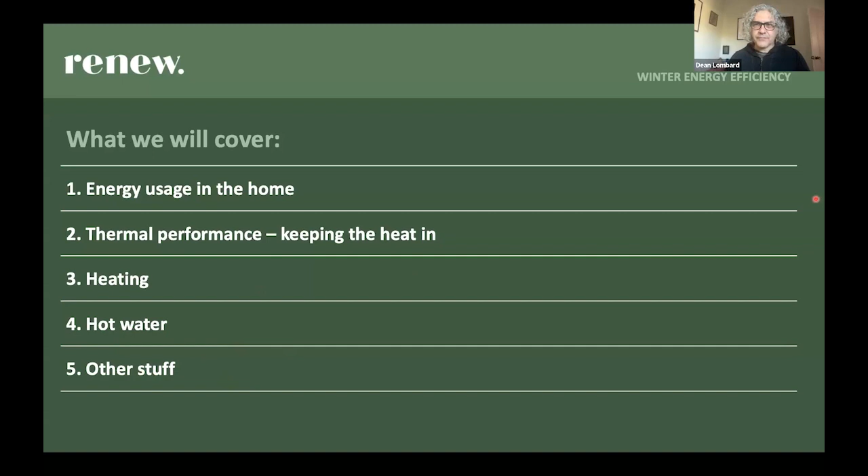Then we'll talk specifically about heating, keeping warm, because that's always our biggest concern in winter. We'll talk a bit about hot water too, because that's also a big form of energy use, and more important in winter than in summer, because we really like to warm up in a shower or a bath. Then I'll go into a whole lot of other stuff, talking about the smaller but still effective types of energy usage that we have in the home.

It's also the average for Australia, so things vary a bit in different climates and areas where different types of appliances are used. It also varies according to the size of your household and lifestyle, so it's really just a rough average, but I think it's very indicative because it shows that nearly half of our energy usage in the home is for either heating or cooling or both. In colder climates like Melbourne and Southern Victoria, that's more heating and not as much cooling. In warmer climates, it's a lot more cooling and hardly any heating, but the proportion remains remarkably similar around Australia. It's just the most important thing we use energy for in the home.

The next one is water heating, and this can vary a lot depending on the technology you use to heat your water, but this is sort of an average.

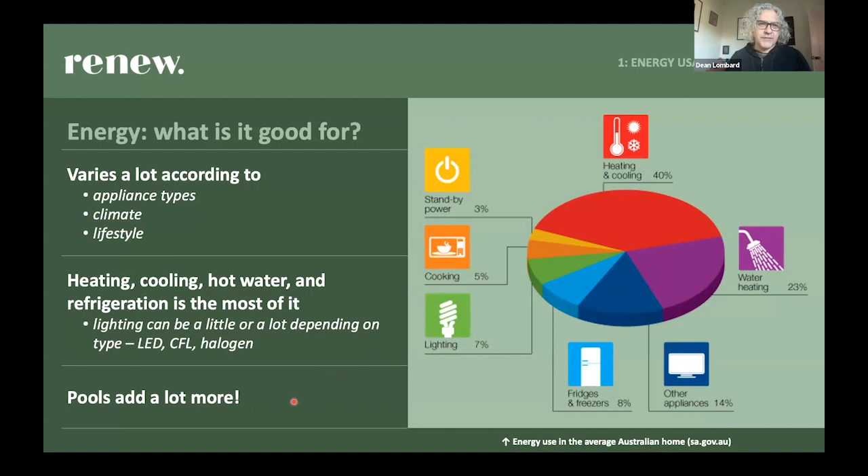If you've got a pool, that changes the whole thing, because pool pumps and filtration use a lot of energy. And if you've got any particular stuff you use that's less common, like kilns or welding equipment, that can make a difference too, depending on how much you use it. But this is sort of the average.

When we're thinking about how we can save money and energy in our home, it's always good to think about what am I using now? Am I using a lot or a little for the value I get from it? Because you might already be using energy efficiently, and then you'd have less you can do to make a difference. Alternatively, you might be using energy quite inefficiently without even realizing it, and then you've got a lot you can do.

That's a good indicator of what times of year you use more, and that's usually dependent on your heating and cooling. The other useful thing in the bill is it looks at your daily usage, and your daily usage is always written somewhere. That's a really good benchmark figure for you to make rough calculations about how much it's going to cost me.

It actually looks at your daily usage and compares it with typical households of different sizes in your area. This is from this big project that the Australian Energy Regulator has done, where they've looked at typical households in all different areas of Australia and worked out what's the usual energy usage for those households. Again, we're all different - we all use energy differently, our houses are different, our appliances are different. It's a rough guide, but it's a good indication.

Basically, you put heat into your house with your heaters, heating system, whatever, and the heat tries to get out of your house whichever way it can. That's why we have ceiling insulation and curtains on windows and all that, to try to stop that.

Some houses let heat out really easily. You'll know if you're in one of those because you'll run the heater, you'll be warm, and as soon as you turn the heater off, you get cold. If your house is well insulated and prevents a lot of this heat from escaping, the house will stay warmer for a lot longer.

Ceiling insulation is absolutely the most bang for buck in terms of how much you spend to get the most benefit from keeping heat in, because heat goes off in all directions but likes to rise most of all. So if you've insulated your ceiling, you will keep a lot of the heat in.

The other ways heat gets out: through the windows, through the walls, through gaps in the building material of your home, and down through the floor. So there's all sorts of ways.

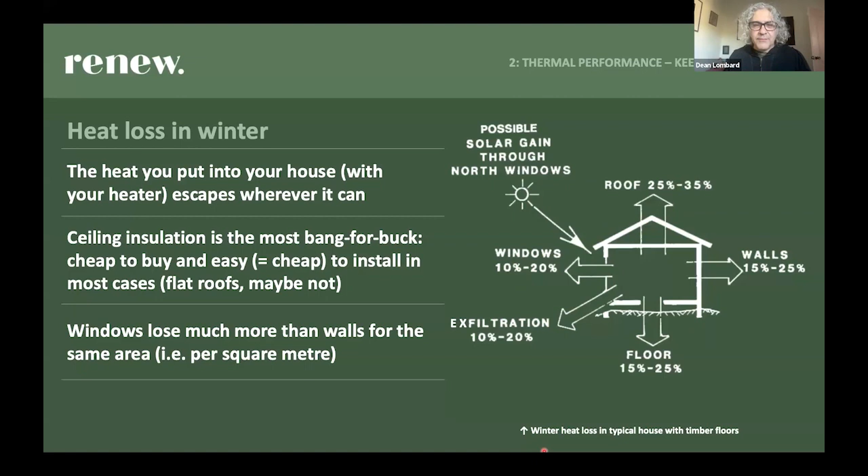Insulation is usually pretty cheap and easy to install, but it's more difficult in some types of roofs, especially flat roofs. So if you don't have a traditional peaked roof with a ceiling space, you might need to do a bit more work to find an installer who can give you good info about how best to insulate it.

Little deviation into star ratings. If you're doing a major renovation or buying a new home, it will have to have a NatHERS star rating.

This is a national system for rating the energy performance of houses based on the design specifications. The current standard for the last 10 years has been 6 stars, and recent changes to the building code are introducing a 7-star standard. A typical existing home is maybe about 3 stars.

A home built in the last 20 years will usually be at least 5 stars, though there is a bit of an issue where some houses actually perform lower than they're supposed to.

The star rating just reflects the ability of the house to keep the heat in. This really shows that if you do some work to make your house keep more heat in, you can save a lot of energy and money and still feel as warm, or probably warmer often, because more thermally performing houses keep the heat more stable inside.

If you've got an old house, it's pretty hard to get it up to the 6 or 7-star standard, but it's not so difficult to get a lot of them a couple of star numbers ahead of where they are. That makes a big difference - every star increase makes a big difference with energy usage and cost of energy.

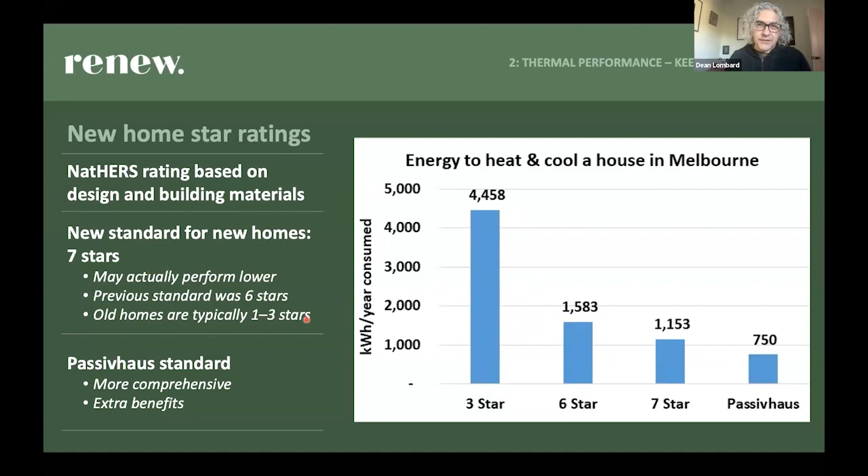There's also another type of star rating called the Residential Efficiency Scorecard that's specifically designed for assessing existing houses, rather than the NatHERS system, which is based on plans and new houses. This was developed by the Victorian government, and if you go to homescorecard.gov.au, you can find an accredited residential efficiency scorecard auditor.

They'll come to your house, talk to you about how you use your energy, and assess the home - looking in the ceiling, at your walls and your appliances. They put together a detailed report and give you advice as to what you can do to most effectively increase your comfort and reduce your energy costs.

As part of this program, they're also building a bit of an information bank about the variation in performance of houses across the state, which is useful for looking at policy issues. I really do recommend it - it costs a few hundred dollars usually to get one of these audits, but it's pretty worth it. You can save a lot of money, especially if you own a house and can make substantial changes, like changing appliances or insulation.

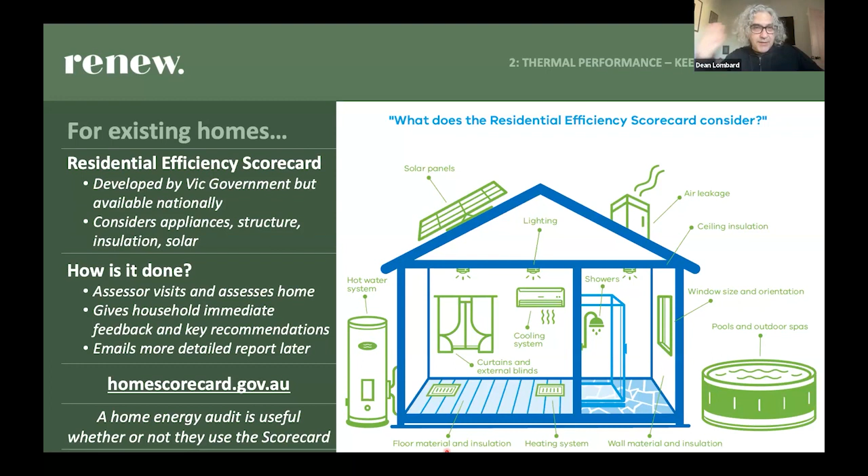I had one done in my house several years ago. I was renting, but they had a scheme where they did it for renters. And even though as a renter I couldn't do that much to change my house, the audit still was really useful and helped me make some big changes just in how I use my appliances.

The residential efficiency scorecard is literally a scorecard where they rank your house on these different areas and tell you how good it is. Then they tell you what you can do to make it better. So that's a good one to understand more about how your home performs.

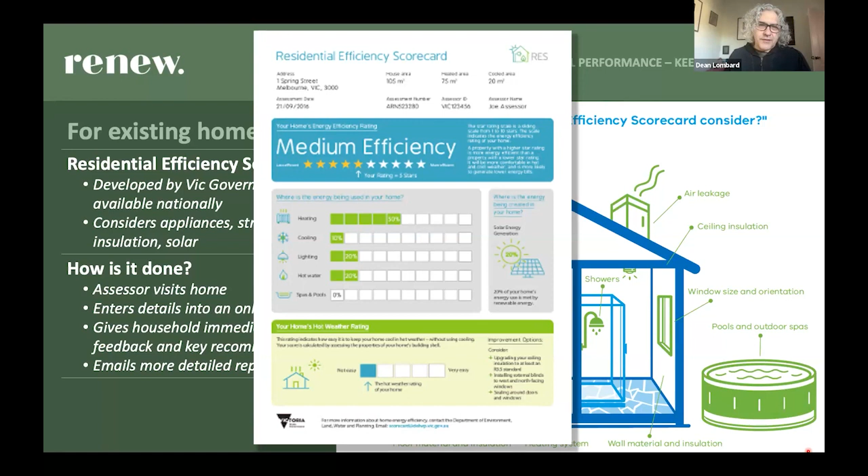That information can often help you figure out, okay, if I've got a limited budget to upgrade my home to make it more efficient, what should I focus on most? What gives me the most value? If you don't have good insulation already, ceiling insulation is usually the biggest bang for buck, because you lose so much heat out of the ceiling.

There's a bit of information about insulation - the R rating is just a system for measuring how thick the insulation is. R5 is pretty typical recommendation for ceilings, and walls are about half that.

A lot of houses have partial insulation in the ceiling, sometimes just because of bad installation, sometimes because of things like downlights that can't be covered by insulation, so they have gaps around them. You've got to really be careful of gaps in your insulation, because even small gaps actually reduce the performance by quite a lot. By the time you've got about 10% of your ceiling uninsulated, the insulation is only doing half the work it could be doing.

So that's good to know. One thing I did with that rental house where I got that inspection was I discovered there was a bit of insulation missing, and I got a bit more put in and made a heap of difference, even though it was just a bit. So that's good to keep in mind.

Wall insulation is much more difficult and expensive to retrofit in an existing house. If you're building a house, it's a no-brainer, and that's pretty much required by regulations now. But it's not always cost effective in existing homes - which doesn't mean it has to be cost effective, because it will make you more comfortable as well as save money, and that's worth something. It's much easier in some houses than others, depending on the construction of your walls. If you want to retrofit wall insulation, you really need to talk to an insulation specialist to find out what options are for your house.

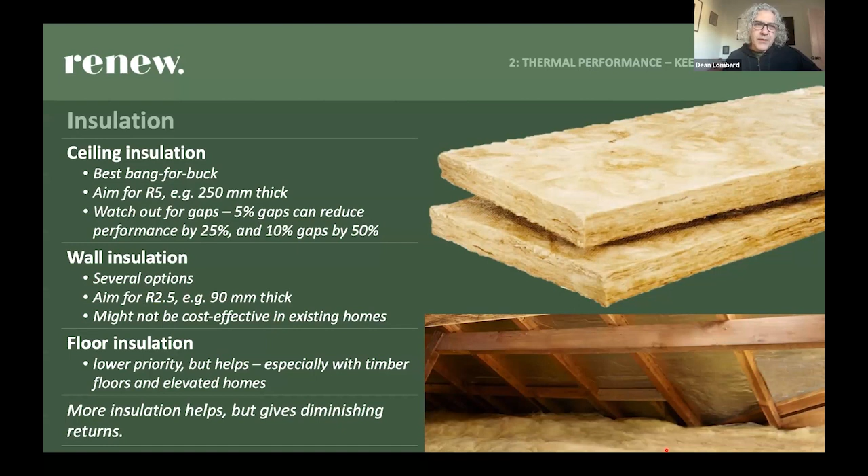One important thing about insulation is, as some of you might remember from the insulation scheme 10 or so years ago, there are a few safety issues with insulation if it's not installed properly. A lot of people do insulation themselves. It's completely legal to do it yourself, it's not like electrical work where you have to be licensed.

But there are some serious safety issues. So we strongly recommend, if you want to DIY ceiling insulation, it's not really advised unless you've got experience working in roof spaces, or some training. The risks include dehydration, injury, electrocution, and actually house fires. This photo is from a house that had insulation covering halogen downlights, which caught fire. Yes, all of those things have happened.

If you remember the free insulation scheme, it was these incidents that led to the end of the scheme, even though the rate of incidents was actually lower during the scheme than before it. But the increase in insulation was so big that it was very noticeable. So just be really careful if you're doing that, and really recommend you've got experience or training before you do it. Sustainability Victoria's website has good information about safety tips for installing insulation, you can just Google it and find it.

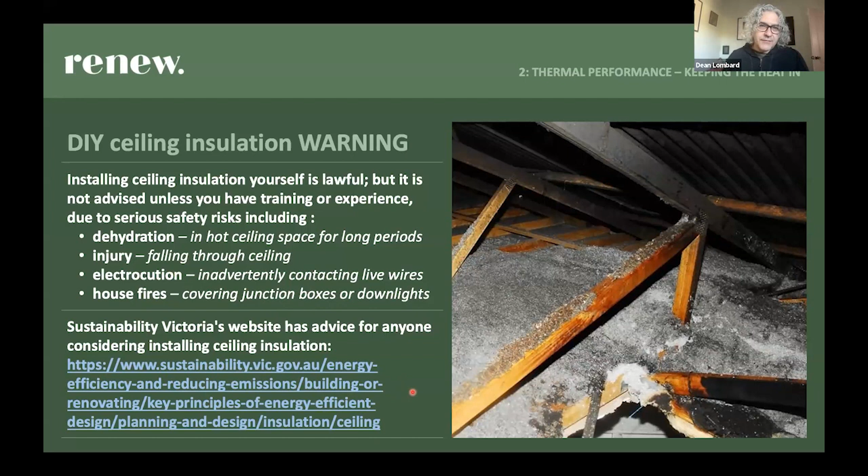Like I said, the other thing is windows. This picture is from a thermal camera, and as a quick aside, some libraries around the Western Suburbs councils have energy efficiency kits you can borrow. I think Hobsons Bay might be one, and I know Maribyrnong has them too. These kits have thermal cameras and other equipment that helps you find efficiency issues in your home. Thermal cameras are great because you point it at the house from inside or outside, and it shows where the heat or cold is getting in or out.

This house has good insulation in the ceiling and walls, and the red bit is warmth coming out, while green and blue is coldness. You can see all this heat is coming out the windows, some around the eaves, and out the garage door. These are the weak spots in the house where heat gets out more easily. This is a good example of why window coverings are so important for keeping the heat in.

People might use double glazed windows as well. They're also very effective, but window coverings, like good thick curtains, are almost as effective as double glazing, but far, far cheaper in an existing home. If you're building a new house or a major extension or renovation, double glazed windows are really worth it. They cost a bit more, but they perform so much better. But replacing existing windows with double glazing is very expensive, and it takes about 60 years to pay back, so not so worth it financially.

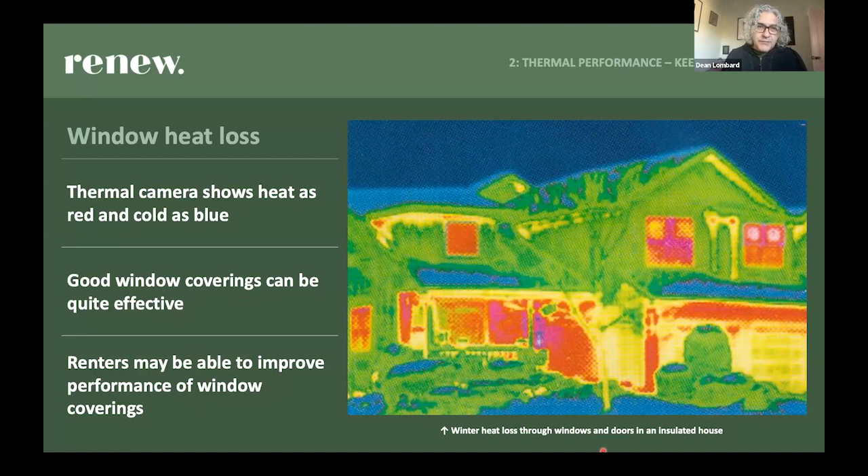But good curtains or special blinds are pretty good for windows. Here's a little thing on windows: a window with thick curtains loses nearly half as much heat as a window without curtains, and pelmets make it even better. You can also get honeycomb or cellular blinds that fit into the window frame and make a good seal, with an air gap that insulates pretty well.

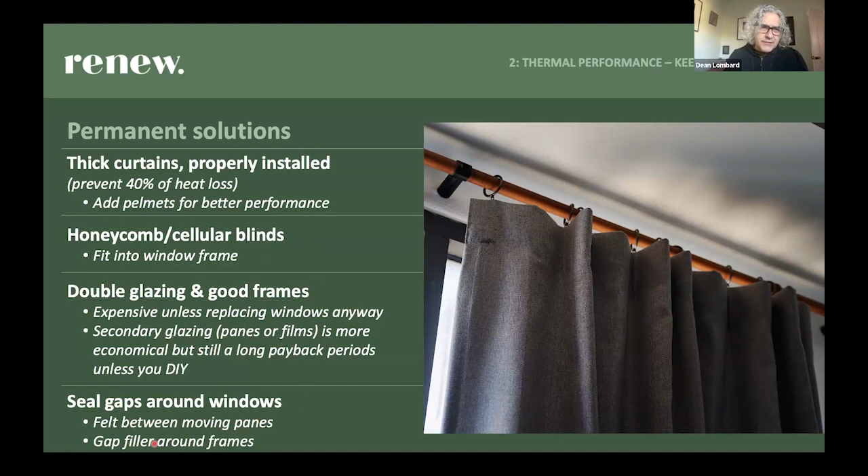I mentioned double glazing, not so cost effective as a retrofit, but certainly good if you're building or extending. Also look for gaps around the windows, around the window frames, anywhere where a thing goes into the wall there's going to be gaps, and filling gaps between panes of glass and between the window frames can really make a big difference.

I just want to explain the importance of pelmets. Even when you've got good warm curtains, like here's a good warm curtain and there's your window.

When the air is heated in the room, the warm air, which rises, actually travels along the ceiling and goes down in the gap between the curtain and the window, races past the cold glass, which sucks all the heat out of it. Then the air does a full loop and comes back in under the curtains as a cold draft, making you colder, making your feet cold. The heat's leaving the room. So this is the one issue with curtains, this circular air current happens.

And that's why pelmets are a thing. Some of you will have pelmets, you would have seen them. They're just like a little half box sort of thing that goes over the top of the curtain, down the side, across the top, across the front. The pelmet stops that movement of air, so the air can't go down because it's covered. So a good pelmet that covers the whole top of the curtain basically stops that air movement and really improves performance by about another 25%.

It makes such a big difference. Some people also put pelmets down the side. It helps a bit more, but the top is most important.

Pelmets come in all shapes and sizes. Some of them look a bit naff and some of them look quite nice. It depends how you do them.

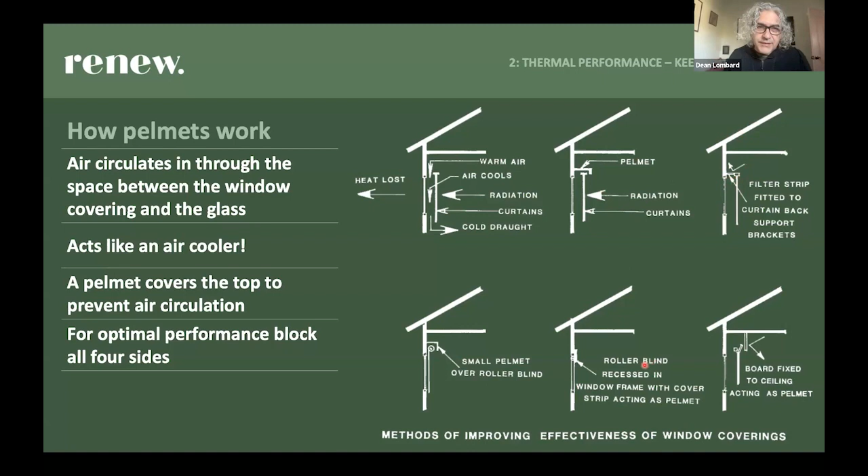But even if you don't get proper pelmets installed, or can't afford to do it yet, improvised pelmets like a bit of cardboard or corflute across the top of the curtains that stretches from the window frame reaching across to the top of the curtain, just anything to block that gap works very effectively. A lot of renters do this, putting a little makeshift pelmet across to the curtain rod to stop that movement of air.

The other thing you can do that's a bit DIY is what often gets called renter's double glazing, which is literally sticking bubble wrap on your windows. It works the same way as double glazing by creating an air gap between the glass and the room. That's how all insulation works, by putting that air gap to stop the transfer of heat.

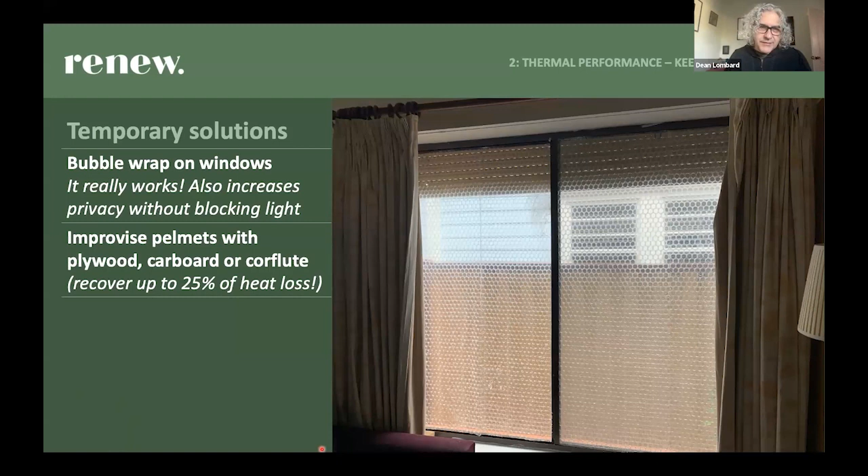You can get these more expensive window films designed as a more permanent-ish double glazing type thing, like a plastic film that you adhere to the window frames and then shrink with a hairdryer. So there's a few options out there for what they call secondary glazing or double glazing. It's always worth looking into, it does make a difference.

Houses need a bit of ventilation, so you don't want to completely remove all gaps, but most existing houses have way more gaps than are actually needed for proper ventilation. So dealing with these little drafts stops you feeling cold, because a cold draft blowing across the room also takes the heat out of the air.

So there's all sorts of things like door snakes for under doors, or you can attach draft stoppers to the bottom of doors. There's different types for different types of doors.

If you're not using a chimney, there are covers you can put out there, or things called chimney balloons that you inflate in the chimney to stop the air going out. For exhaust fans, you can get covers that have little flaps, and when the exhaust fan's running, the flaps open, but when it's not running, it closes again to stop it being a source of draft into the ceiling space.

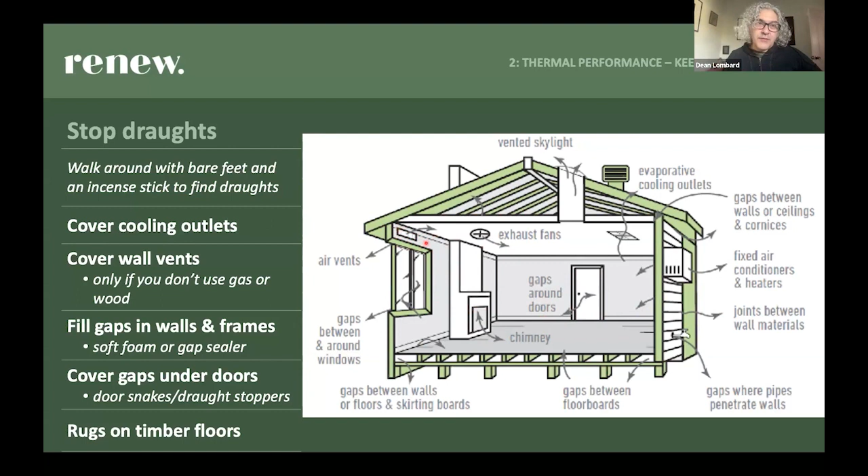If your house doesn't have any gas appliances - no gas cooking, no gas heating, and no wood burning appliances - then it's okay to cover up those vents to prevent heat loss, but very seriously only if you don't have any gas appliances or wood burning in the house, because they're very important for safety. You would have heard of news stories of people dying in houses due to a buildup of carbon monoxide, and that's what these vents are designed to prevent.

People sometimes ask, if I try to do my draft proofing, can I do too much? Can I make my house too tight? Yes, it's possible technically - there's actually a sweet spot. Like I said, you need ventilation. If your house is really leaky, it's drafty, the heat escapes, heat gets in during summer, and insects get in. If the house is too tight, it can cause mold and condensation and a buildup of carbon dioxide. It's actually pretty difficult to make a typical home so tight that you get these effects.

Most homes are pretty leaky, and a lot of attention to blocking up drafts gets you to this sweet spot where you're still well ventilated, but you're stopping the drafts that are taking the heat away. So it's usually good to try and do what you can to block up drafts. But just be careful if you are burning gas or wood to make sure that you leave the right amount of ventilation - usually those high ceiling vents are a good way to do that.

And draft stopping is significant - good draft stopping in a house can reduce heat loss by about 20%.

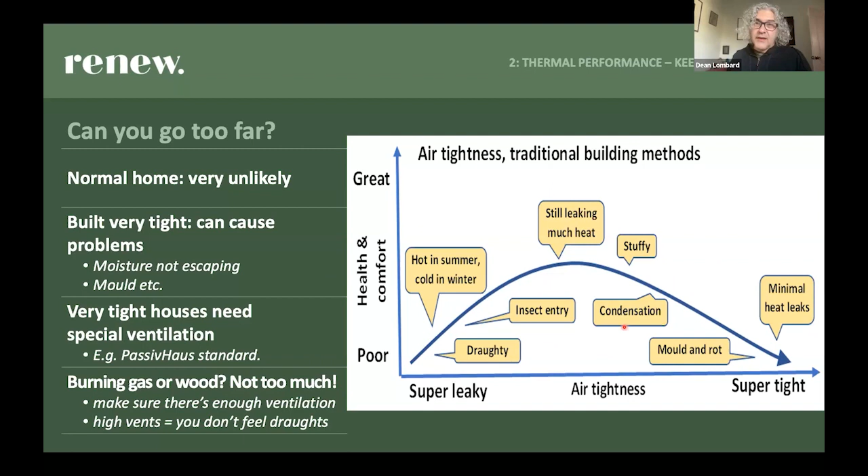The other thing that's interesting with the thermal performance of the house is what we call thermal mass, which is solid surfaces or materials that absorb heat. The classic thermal mass is like concrete slabs, if your house is built on a concrete slab, and solid brick walls. We've all experienced a garden with a brick wall that the sun shines on, which radiates heat and is good for the plants.

Some of you might experience a big window where the winter sun shines through and heats up the concrete floor and helps keep the house warm. This is really great for winter warmth, because it even works if you're heating the house and it's got, say, brick walls - the heat will soak into the bricks and hang around and keep you warm. There used to be heaters called heat banks that were literally a bunch of bricks that got heated and slowly released the heat.

The thing you've got to be careful with thermal mass is that in summer it can be a problem if you're taking too much heat from the sun when you're trying to keep the house cool. So if you're designing or changing your house, a good approach is to ask: how can I get sun in the house during winter onto my thermal mass? And then in summer, how can I shade that same place so the sun doesn't come into my thermal mass? So-called passive solar houses are designed like that, often using deciduous vines to give shade during summer and allow sun in during winter. The right size eaves can work for that too, because they let the winter sun in but shade the summer sun, since the summer sun is higher.

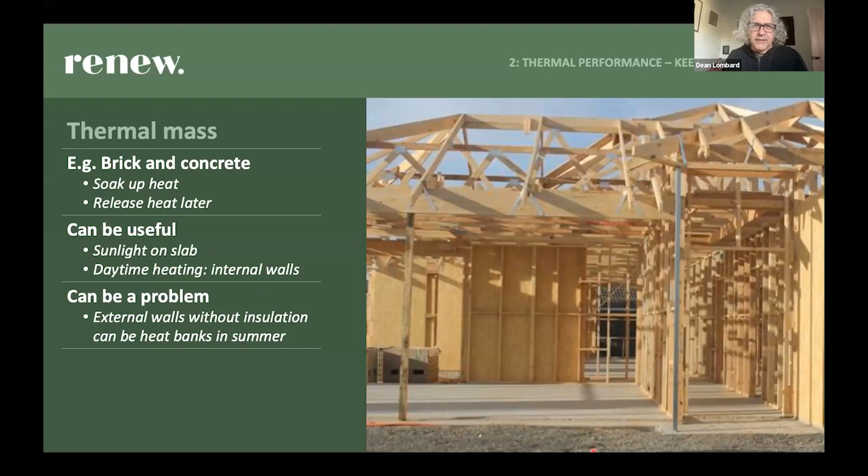But basically, they're very efficient. They're the lowest cost to heat an area. They're also low emissions because they use so little electricity that the emissions from that electricity are less than the equivalent emissions from running a gas heater to the same level. So the modern all-electric homes are all about having reverse cycle air conditioners - they cool and they heat.

In a house designed to have reverse cycle air conditioner heating, you'll have a few throughout the house, like a big one in the living room, and smaller ones strategically placed so you can heat the whole house. A lot of existing places might just have one that you've used as an air conditioner - that can still work pretty well for heating. And if you've got some money to invest in upgrading your heating, adding one or two more reverse cycle air cons is really the most effective way of doing that.

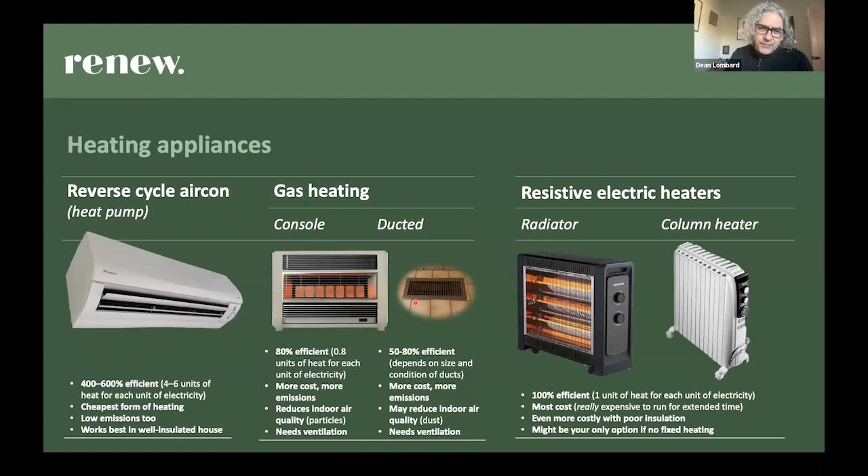So if you're stuck with portable heaters, they do the job. Focus on heating yourself or a small room more than the whole house. You really need fixed heating to heat the rooms well. The gold standard is really the reverse cycle air conditioner. Gas heating does well enough, but it costs more to run and causes more emissions.

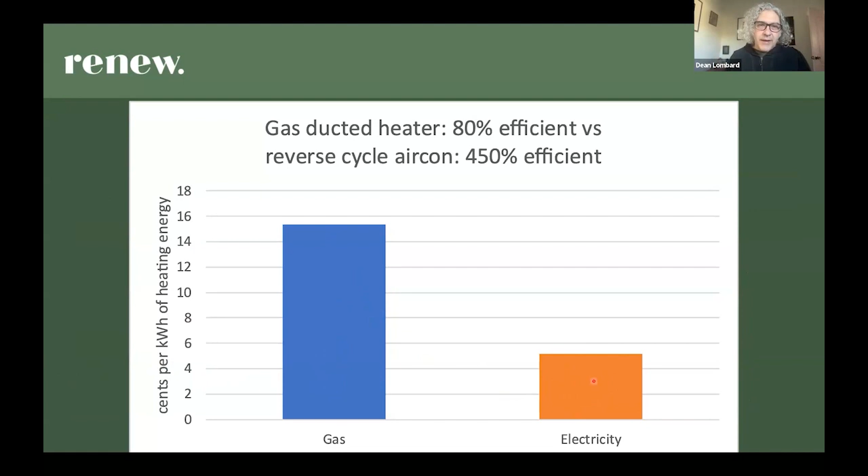This is just an example of the cost. This is some modeling we did a few years ago of the cost of making the same amount of heat with a gas heater versus a reverse cycle air conditioner. This is literally the cents per unit of heat energy created by the heater, and it's all about how reverse cycle air conditioners make such great use of the electricity used to operate them. This is basically how it works.

The shortcut answer is really a heat pump. A heat pump is basically a fridge in reverse. It's the same technology used in fridges, but done backwards to make heat instead of drawing heat out.

Basically, the electricity that runs the reverse cycle air conditioner doesn't actually produce the heat itself. It just runs a compressor and a fan that sucks in air from outside, and when it compresses it, it actually sucks all the heat out of the air and sends that heat to the internal unit, which then blows the hot air into the room.

You might think that cold air outside on a day like today doesn't have any heat in it, but that's not true. It does have heat in it. Just to make the point, 2 degrees is pretty cold, right? But -6 degrees is a lot colder than 2 degrees, which just means there's still some heat in that 2-degree air. It's just that we're not experiencing it as heat. So no matter how cold it is outside, there's enough heat in the air that the compressor can extract it and send it to the heater and blow it into the room.

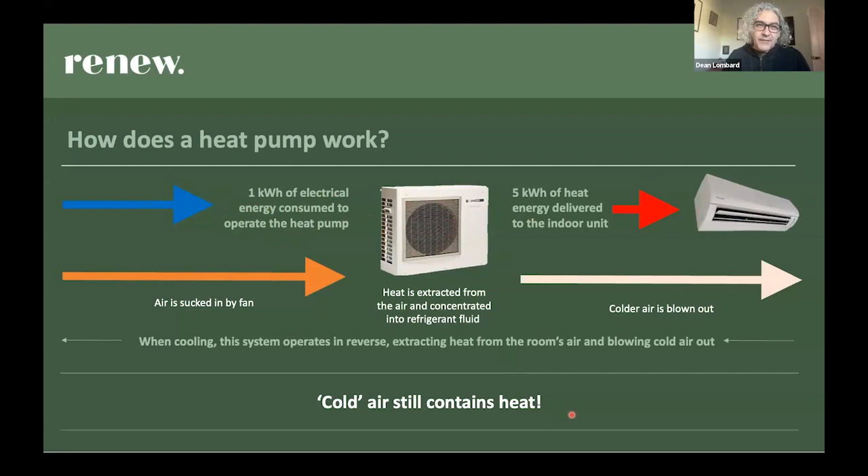Heat pump heaters are everywhere in cold countries like Scandinavian countries. This is how you multiply the electricity energy that goes in to make more heat come out. This is why they're so efficient and why they end up being such low emissions.

So if you're buying a reverse cycle air conditioner, the most important thing is just to get the right size for the room, because sometimes people's disappointment with a heater is because they bought the wrong size for the room. Find out the right size for the room, talk to a heating specialist about it.

If you don't like the air blown from the heater, and some people don't, just run the fan on low speed. It still heats just as well. If your house is well insulated, then the air temperature does equalize through the room and through the whole house.

Usually the ideal way to do it is to have a couple of them, like 2 or 3, depending on the size of your house, so that you can heat different areas and the air from all of them sort of mixes together and makes a nice warm home.

You can get heat pumps ducted, but the same issue with ducted gas heating, the ducts actually lose heat. If you're buying one, look for a high efficiency, like a high star rating. The appliances have their own star ratings. In almost all cases, the extra cost for a more efficient heater will save you more than that extra money in running costs over a few years.

The more expensive ones also have lower noise, which can be helpful if you're in a more congested, medium density neighborhood area, because there are limitations on noise as to where you can install them. So the low noise ones will make everybody happy. But yeah, there's a lot on the market. They've come down a lot in price the last few years because they're so much more common.

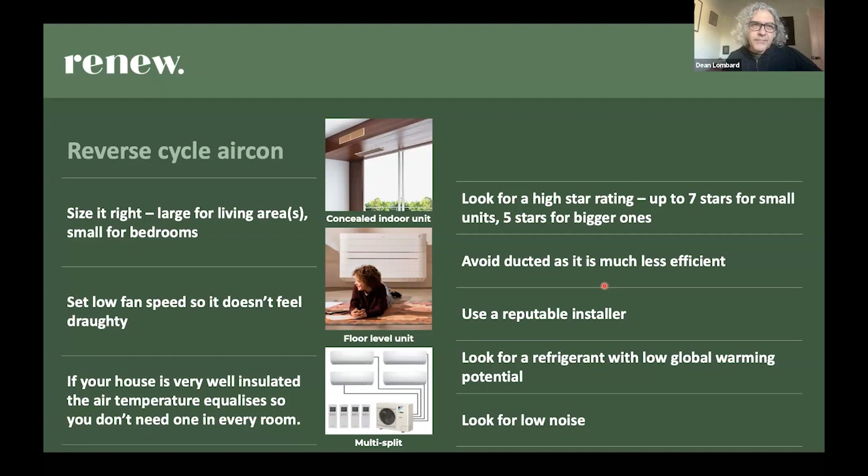General tips for heating: generally heating the rooms that you use and not the rooms that you don't use means that you're using less heat.

It depends a bit on the type of heating. If you've got ducted heating, you need to heat the whole house, because otherwise, if you close off too many rooms with ducted heating, the air can't circulate back to the intake area, and it actually causes a draft and makes the house colder.

But if you don't have ducted heating, it's great to close off doors and windows and just heat the areas that you use. But balance that with - like I was talking to someone the other day, they've got reverse cycle air conditioners in the 2 rooms on either side of a hall, and then the hall gets cold. So in that case, if you want the hall to be warm, open the doors, let the hall get warm as well.

So strategic use of doors and windows in the house helps to get the heat to spread around where you want it and not waste it where you don't want it.

The thermostat, which controls whether it's ducted heating or a reverse cycle air conditioner - in which case the thermostat usually works in the heater - keep that out of drafts, because drafts can make the thermostat read falsely and overrun the heater.

Speaking of the thermostat, as Belinda mentioned before, think about what level you set it at and balance what you wear with how hot the heater is, because every degree lower that the thermostat is saves you a lot of energy and a lot of money, more than you would think.

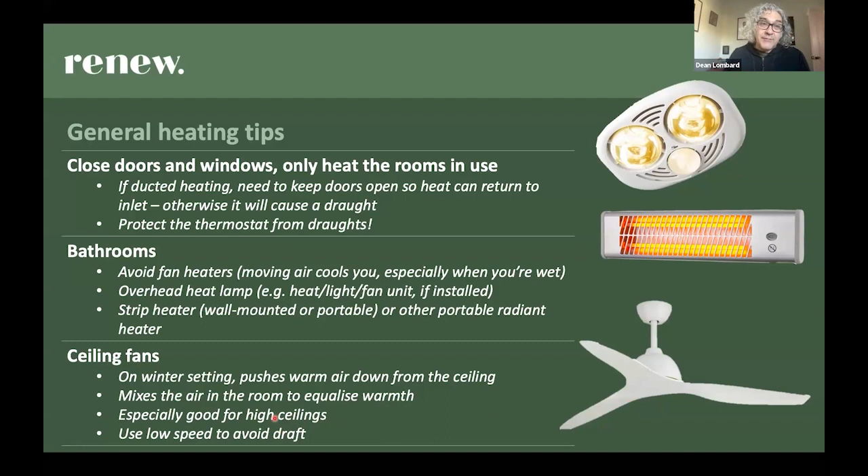We mentioned warm clothing before, and Belinda also mentioned that, especially if your house isn't well insulated or you haven't got good heating, warming yourself is actually the most effective way to keep warm. You can get electric throw rugs, like an electric blanket you put around you, they cost barely anything to run, and they're great if you tend to get colder sitting still. You can also get heated floor pads, very low energy usage because they don't need to create much heat since you're touching them directly. If you work at a home office and get cold, a low power radiant heating panel or fan heater can help, and if you use it sparingly it doesn't cost too much.

Warmer clothing always helps. Belinda mentioned natural fibers are generally pretty good, wool is really great, but polar fleece also works well. Some people like puffer jackets because they're light and warm, and something on your feet helps too, especially since if there's any draft in your house it's going to be coming along the floor somewhere. Also for working at your desk, heated mouse mats - I've never used one, but I know a few people who swear by them. And hot water bottles and wheat bags are pretty popular too, it's like keeping a hot thing next to you, like having a dog or a cat, same thing.

Just be mindful that there are some pretty serious safety issues with hot water bottles and wheat bags. If you're not careful, they can actually cause serious injuries. Hot water bottles that burst can cause serious burns, and wheat bags, if overheated, can actually spontaneously combust. So follow the instructions - it's recommended that you change hot water bottles annually, and be very careful that the cap is done up tight and the washer is in good condition. It's also recommended that you don't put boiling water in hot water bottles, but heat the water to about 60 to 70 degrees.

So that's a quick rundown on personal heating. I'll go quickly onto hot water because, like I said, heating is the biggest use of energy especially in winter, but hot water comes in second. We often think of water-saving shower heads as saving water, but they also save energy, because by using less water you're using less hot water, which means using less energy to heat it. So I definitely recommend water-saving shower heads.

Some of the cheap ones are fine, and the more expensive ones usually feel a bit nicer and still save lots of water. You can often get these cheap ones for free from people who come door to door under the Victorian Energy Upgrade program, and they do pretty well - I've got these in my house and I'm pretty happy with them. Some people like to spend a bit more and get more expensive ones with a wider head and more water, whatever you prefer. Shorter showers also help, it's like turning a thermostat down - if you shorten your shower by 1 minute every day, you can save a lot of money per year in energy and water costs.

Aerators on taps, which you screw onto the end of the tap, are sort of like water-saving shower heads for taps, and they're good for taps where you use hot water a lot because they'll save energy as well. Most modern taps have a little thread - some have an inside thread and some have an outside thread, so just find out which one you've got. You can buy these aerators for about $10 from Bunnings.

Hot water pipes: when hot water sits in your pipes, it slowly loses heat. We all know in the morning when you first turn on the hot water, it takes a while before it's hot, but if you turn it on a bit later, it's still hot. That's because overnight the water in the hot water pipes went cold, and during the day it stays hot because it's being used a lot more. Hot water pipes are supposed to be insulated, but some older houses don't have insulation on them.

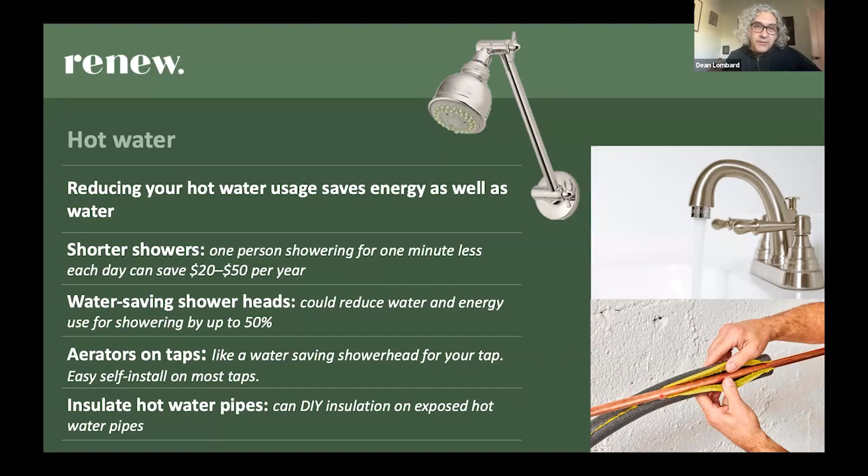In terms of the type of hot water system, a lot of us have gas, especially in Melbourne, either gas storage or gas instantaneous, which heats up as you're using it. You can also get heat pump hot water systems, the same technology they use in reverse cycle air conditioners.

Similarly, they use electricity much more efficiently, and the cost of heating water with a heat pump hot water system is a lot less than even a gas instant hot water system, which is generally the most efficient type of gas hot water system. That's again because of that heat pump multiplier effect.

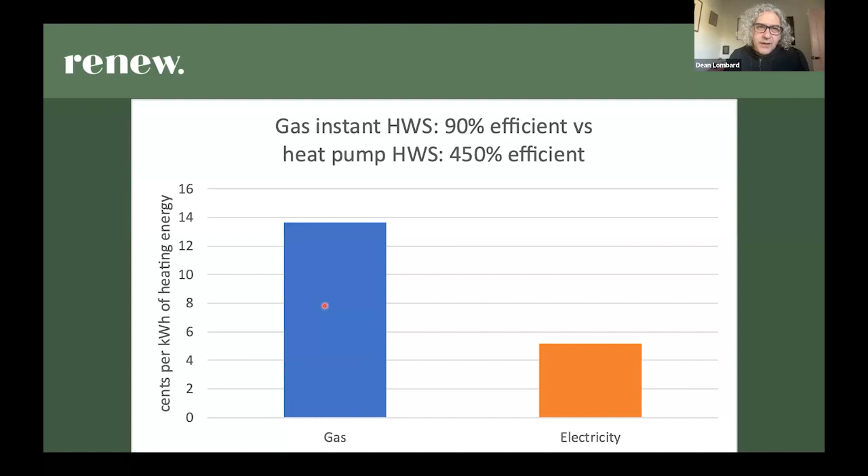So there's a few different types of heat pump hot water systems, and if you're looking at going all electric, the heat pump hot water system is really the way to go. They're a storage system - they either have the compressor separate like a reverse cycle air conditioner, or integrated with the tank. Again, people who complain about not getting enough hot water got the wrong size for their household. Get the right size one for your household.

With the heat pump, because it's so cheap to run, it's less of a big deal if you accidentally go a bit too big, because the extra energy to heat more water isn't very much since it's so efficient. Again, cheap brands are more likely to break down and be noisy, so if you can afford it, get a good quality one. The mid-price sort of brands are very good.

Look for the high star rating or coefficient of performance, which shows how efficient they are - the bigger the number, the better. The more efficient one basically costs less to run, so you'll usually save any extra money it might have cost you.

Find a good installer. The thing with hot water systems is we often replace them suddenly because the system failed and we can't have a shower. That's actually the worst time to buy one, because you don't have time to shop around and choose the one you want and wait for it to be in stock. So if your hot water system is really old, have a plan in place - be ready to change it over, or even do it when it's getting close to the end of its life, rather than waiting for it to break down.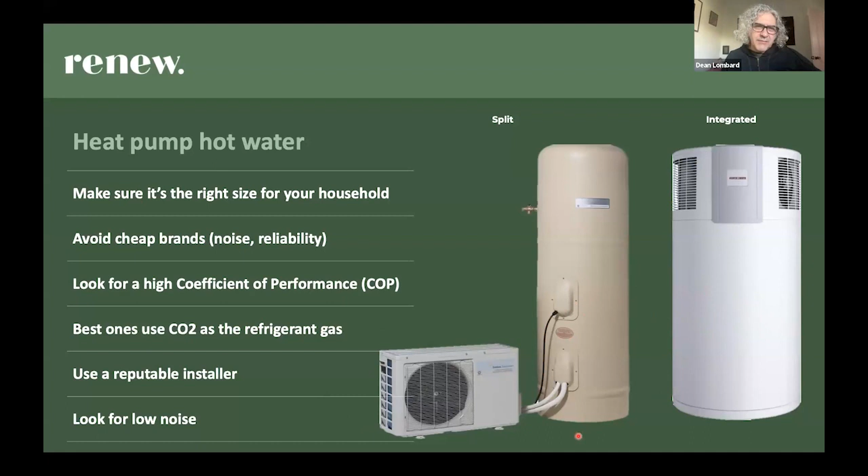A lot of people have solar hot water - solar collectors on the roof, and either a tank on the roof or on the ground. They work pretty well too. Heat pumps actually use less electricity in Melbourne's climate than solar, because even though solar heats up for free a lot, in our colder climate you need to boost them a lot with either gas or electricity. So heat pumps are very competitive with solar hot water systems, and the good ones will be a bit cheaper to run. They're still a bit expensive to buy though - I think prices will come down in the next few years, but they're still a good investment.

We're nearly done here. I want to leave enough time for questions, so I'll go quickly through a couple of the other main things we can do.

One thing I'm not really going to talk about, apart from showing this picture, is solar panels. They're one of the best ways you can reduce your energy expenditure and emissions. Generating renewable energy on your roof is the easiest way to reduce your bills and your emissions. Systems are relatively cheap, and there's a lot of government grants at the moment to make them even cheaper.

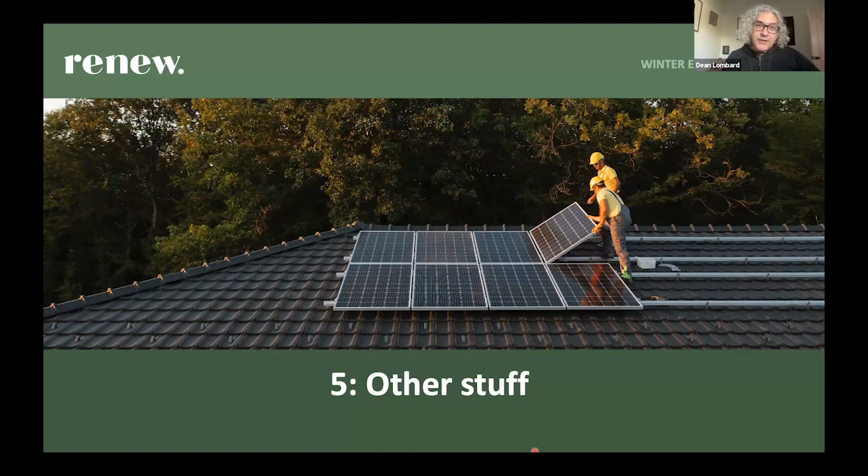Even though the amount you get for exporting to the grid is pretty low, the value you get from using energy directly is very high and will only get higher as electricity prices go up. So if you can afford solar and you've got space to put it, that's fantastic. It really helps. It doesn't make you more efficient, but it certainly lowers your costs.

We know a lot of us are used to talking about the strength of light in terms of watts based on incandescent bulbs, but the proper measure is lumens. So your 60-watt bulb is about 700 lumens, and a 10-watt LED does the same light as a 60-watt bulb. Watts is how much electricity it uses. So LEDs are by far the most efficient.

They use between 10% and 33% less energy than, say, a compact fluoro. Much less than an incandescent, but we probably don't have many incandescents left in our homes anymore. But even compared to compact fluoro, LEDs use a lot less. They run cooler, they last longer, and they're available in different types of light, like warm white or cool white. So they're pretty good.

Again, the Victoria Energy Upgrades program I mentioned, people come to your door offering to do stuff for free. They do LED lights. I had my place done. It was great.

LED lights last for ages. Incandescent lights typically lasted for 1,000 hours. Halogen bulbs about twice that. Compact fluoros 8,000 hours, but LEDs last up to 50,000 hours. Not if you get the super cheap ones - those are a bit crap - but get a decent quality one and they'll last probably longer than you're in the house for. So LED is definitely the way to go.

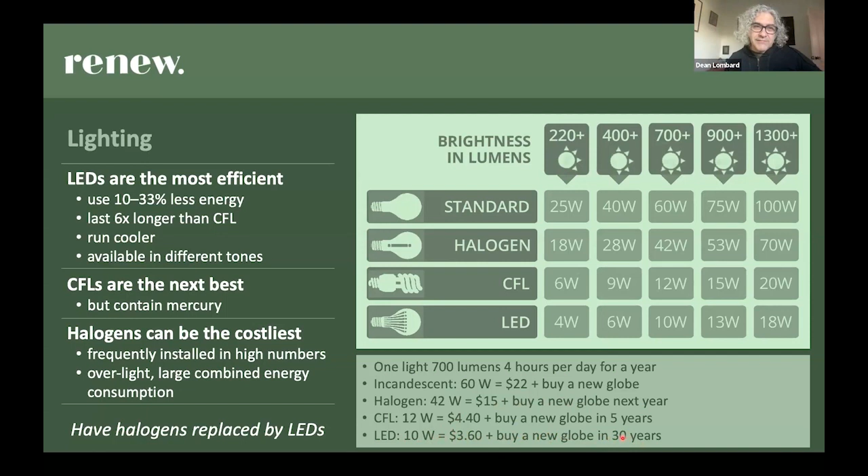A halogen costs $15, but you get a new globe every year. By the time you get down to LED, it's costing you like $3.60 a year, and they should last for 30 years if you get a good quality one. If you multiply that by the number of lights in your home, that's actually significant money saving, not just in energy saving, but in how often you have to replace a globe. So think about lighting - it's small but important.

The last thing about appliances is look for higher energy ratings. That'll use less electricity and save you money. It's especially important for fridges, which are one of the higher energy using appliances in our homes. Old fridges, even if you get the seals replaced because they wear out and become less efficient, are still a lot less efficient just because of how the technology has changed since they were built. So get a high efficiency, good star rating on fridges and other major appliances, and the money you save is almost always worth it.

This chart shows a lot of typical appliances. The blue one is like an old appliance, the orange one is a typical new appliance, and the gray one is the highest efficiency new appliance. While heating, cooling and hot water show the biggest difference, all appliances show a significant difference between the old one, the new typical one, and the new best one. The most efficient fridges available now use half the energy of typical new fridges, and about a quarter of the energy of old fridges. That can really add up.

Pool pumps - again, get the most efficient ones. Variable speed is good. The closer to the pool the pump is, the more efficient it is, because you lose energy with distance. I don't actually know much about pool pumps, but they're a big usage of electricity. So if you've got a pool and you're looking at upgrading your pool pump, I'd talk to an expert to find out what's most energy efficient, both in terms of the pump to get and how to operate it, because you don't need to run them all the time necessarily. A lot of people with solar time their pool pumps to run just while their solar is generating.

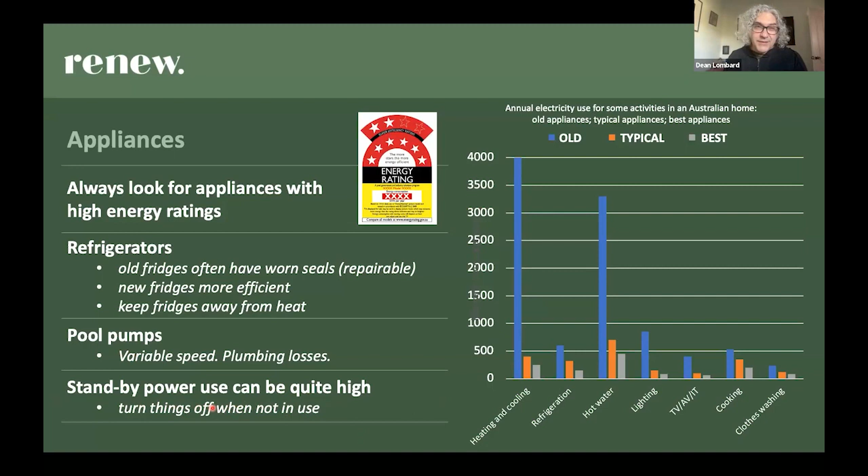A lot of modern appliances with remote controls have standby power. Some new ones now follow standards for standby power, so they shouldn't use very much, but older ones can use a lot. Energy efficiency kits you can borrow from some libraries include a power meter, and you can measure the standby usage of appliances. I did that to my sound system a few years ago and discovered it used a heap on standby, so I got into the habit of turning it off when I wasn't using it, and that made a big difference. All these little things add up.

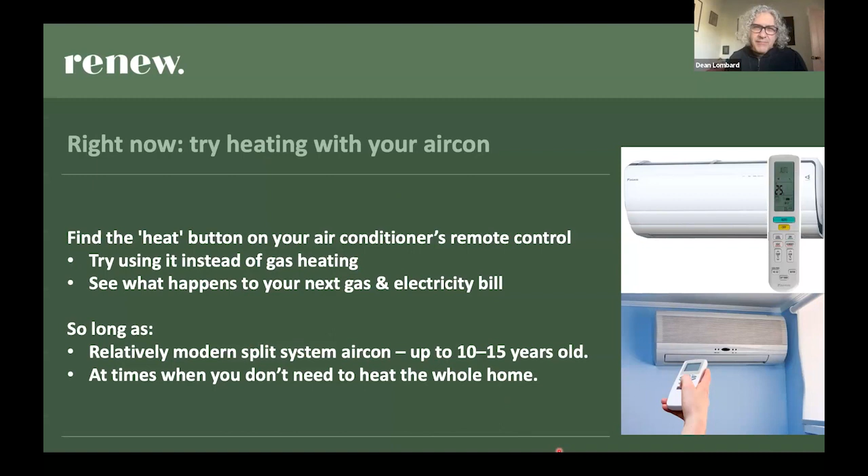That's pretty much it. If you're a bit skeptical about the whole reverse cycle air conditioner thing, just try it. If you've got one, try using it instead of your gas heater next time it's cold. See how it goes, compare the difference, compare what happens with your bill. If it's a relatively modern aircon, you'll find you'll save money, and if you work out how to run it right - the right temperature, the right fan speed - it'll keep you warm.

Just a quick list of resources. I mentioned the Victorian Energy Upgrade Program. Not only do they do free shower heads and LED lights, but they also have big rebates for major appliances like hot water systems and more efficient heating. Worth checking out - Google Victorian Energy Upgrades or go to that website.

I mentioned the residential efficiency scorecard assessments, the $250 power bonus. Sustainability Victoria has good information on efficiency, especially if you're looking at going all electric with your home, so have a look at their resources - really useful. There's also the Your Home website, yourhome.gov.au, a national website with lots of information about making your home more efficient. Renew is putting together a Getting Off Gas toolkit with lots more information about efficient electrical appliances, worth checking out. And of course there's the solar homes program the government runs, which has big rebates on not only solar panels but also hot water systems and batteries. All worth checking out.